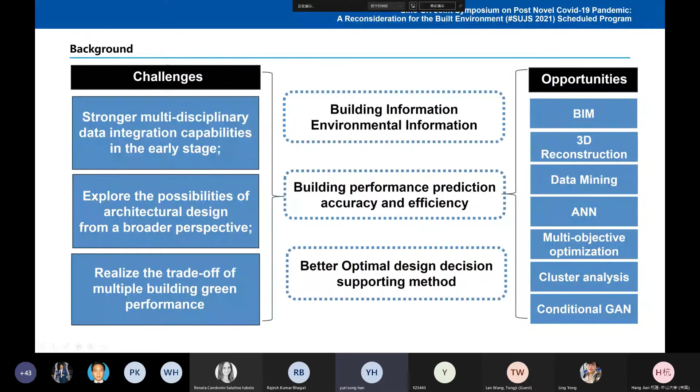We need to have stronger multidisciplinary data integration capabilities in the early design stage and explore the possibilities of architectural design from a broader perspective. Besides, we have to realize the trade-off of multiple building green performance, which has increased the difficulty of making design decisions for green performance optimization. Facing these challenges, we try to couple the AI algorithm and tools in architectural design.

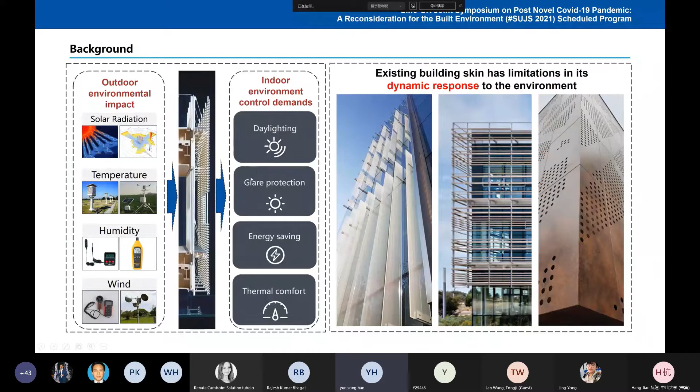And as an interface between indoor and outdoor environment, building facade is an important system, and our study is focused on the adaptive facade. That's because the rapid development of technologies such as fifth generation communications and the Internet of Things have provided development opportunities for adaptive facade. The environmental response mode of the building facade changes from static to dynamic.

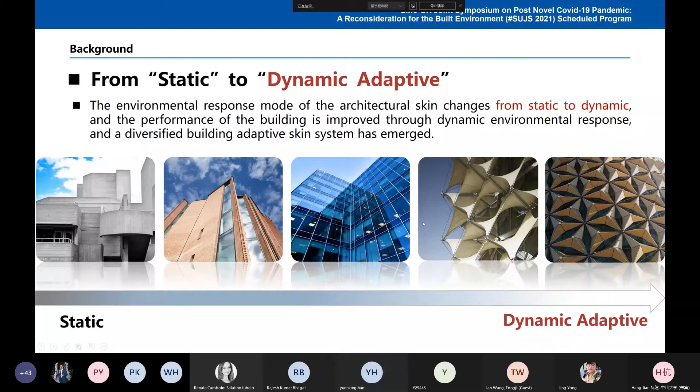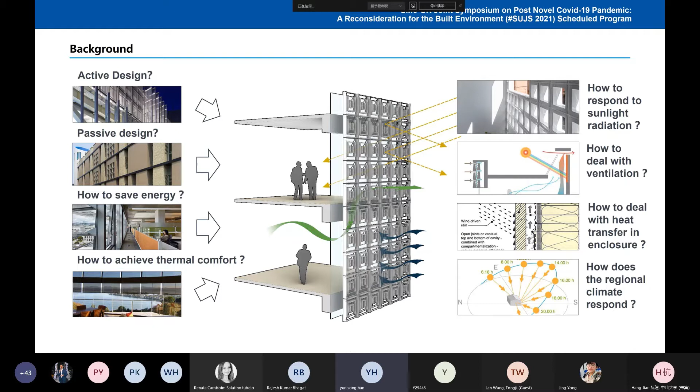And the optimization design of adaptive facade needs to consider the dynamic characteristics of its response to the environment, which further increases its complexity. To improve the optimization accuracy and efficiency of adaptive facades, we explored building information modeling, performance simulation, and decision-making support methods, and proposed several tools. The building information modeling tools have experienced multiple generations of development and have achieved the integration of multiple information, but its modeling efficiency still needs to be improved.

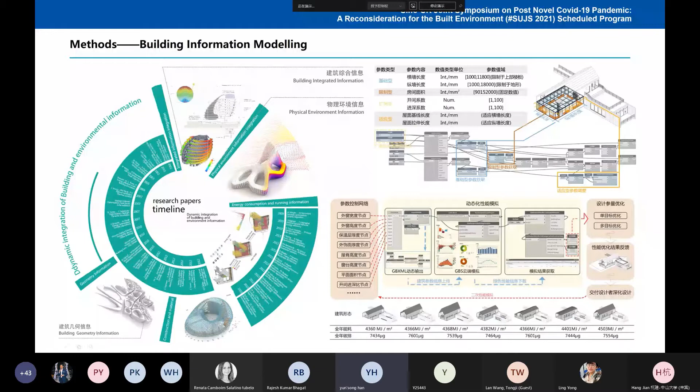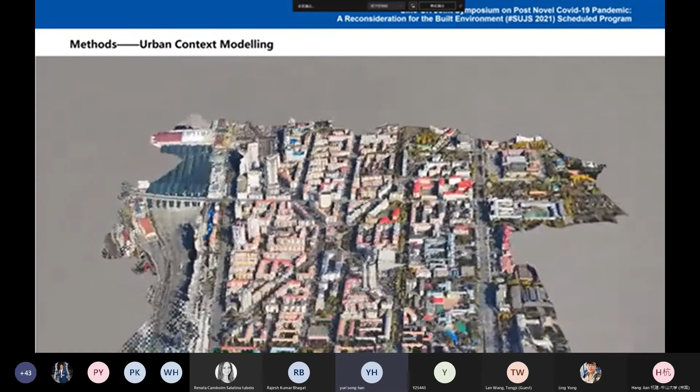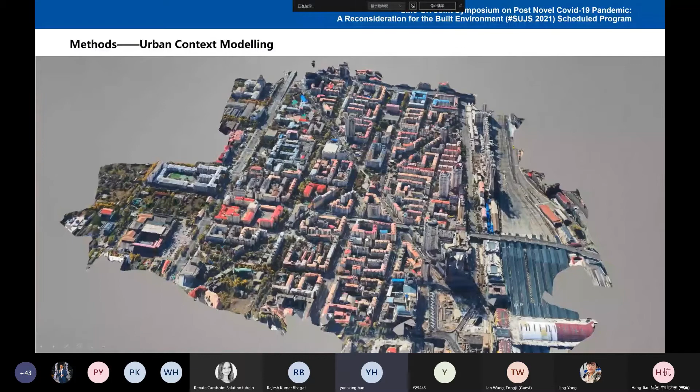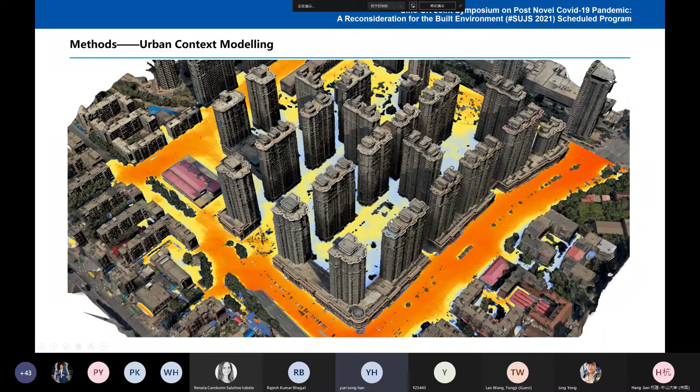We applied parametric modeling technology to integrate multiple types of building information and developed a design tool based on the Revit platform. Besides, precise urban context modeling is the basis for evaluating the green performance of building. The original drawing and field measurement method cannot obtain the geometric information of the surrounding environment, such as vegetation and public facilities, accurately, and is of great labor cost. Therefore, we explored the method to model urban context automatically based on UAV photogrammetry, which goes from image acquisition to image-based reconstruction, and ends with the estimation of green performance of buildings.

We can find that as the level increases, the details of the buildings are enriched, and a comparison of annual solar radiation with or without urban context was conducted. The results show that the shadow of adjacent buildings, vegetation, and urban facilities seriously affect the solar radiation acquired by the building facades, and the magnitude depends on the season.

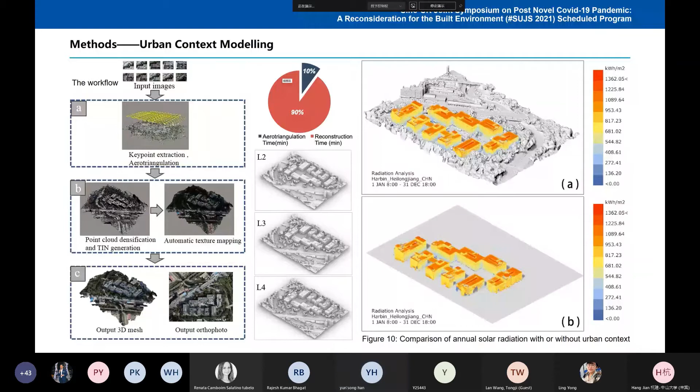Building performance analysis and standards changed the way in which buildings are designed and operated. After decades of development of building performance simulation tools, a huge family of simulation tools has been formed, realizing multi-performance simulation of wind, daylight, thermal, and energy consumption, including 3 types of method: the white box, the black box, and the gray box. However, the evaluation of different design and operation options is becoming more time-consuming and computationally intensive than ever before. Also, building dynamic simulation tools are potentially a suitable way for accurately assessing the energy performance and other green performance of buildings. They require adequate training and a careful evaluation of model input data.

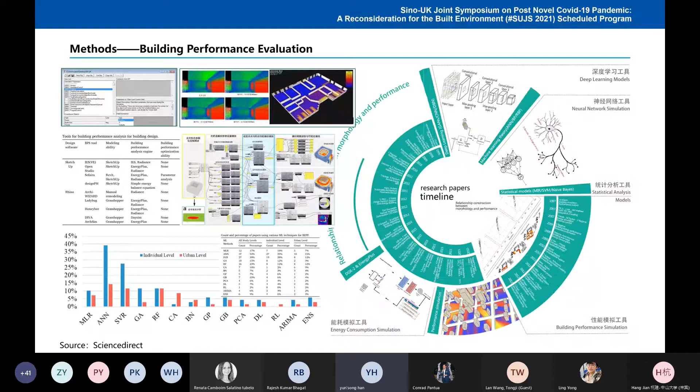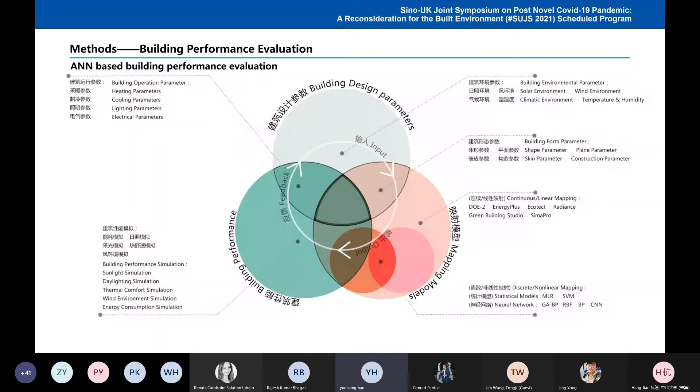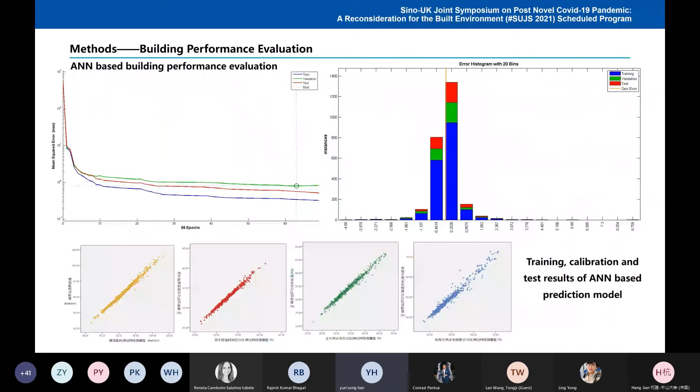In response to this problem, we explored the machine learning-based building performance prediction method, and we trained the artificial neural network model with data samples to establish the mapping relationship between the architectural design variables and the green performance. Although various artificial neural network models have been proposed for green performance prediction, most of these models have critical generalization limitations and are often difficult to integrate in existing design workflows. Hence, we try to improve the model generalization capability by feature engineering and hyperparameter optimization.

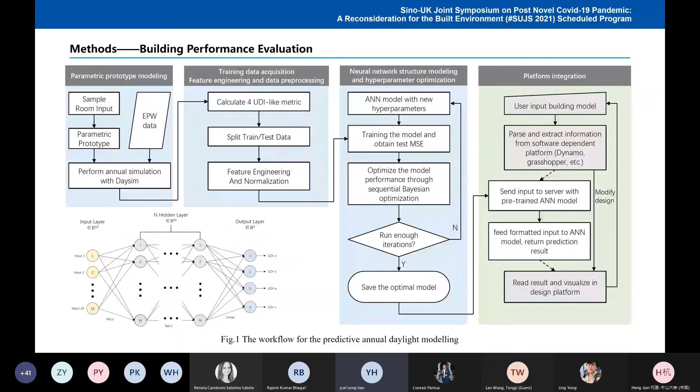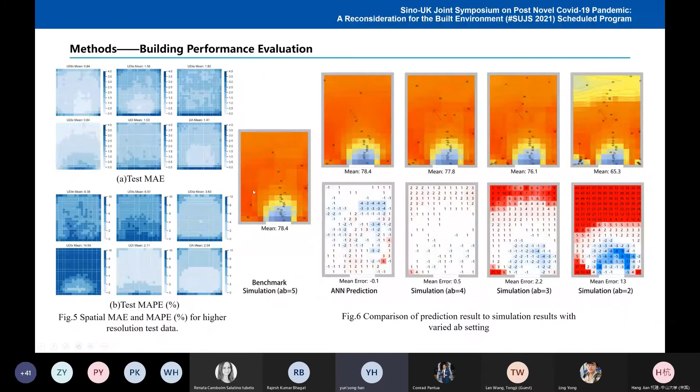The spatial relationship is defined by including sensor point local coordinates as input, and hence the model can predict the daylight performance for any point on the working plane instead of a few predefined ones. The results indicate an overall good fit. The high resolution prediction result matches the simulated values closely, despite the higher error near the walls and corners. This is due to the lack of samples in the original training set and can be remedied by adding higher resolution training data. We also proposed a design platform for multi-objective optimization design, which can realize automatic performance evaluation and statistics of building and surrounding information.

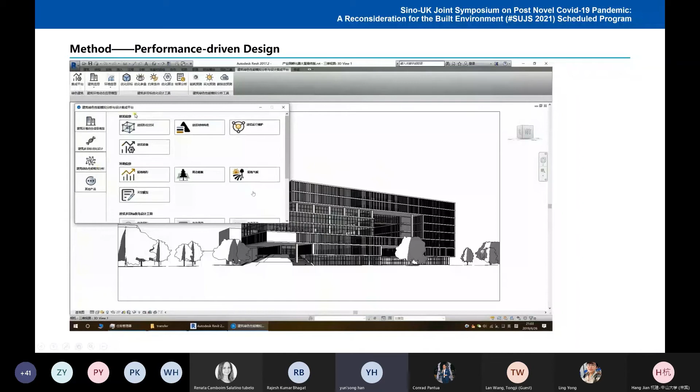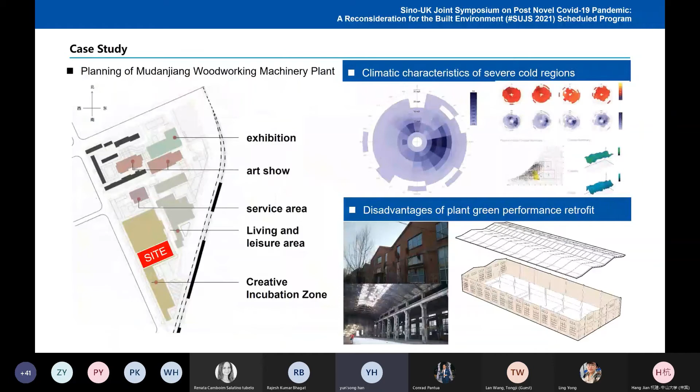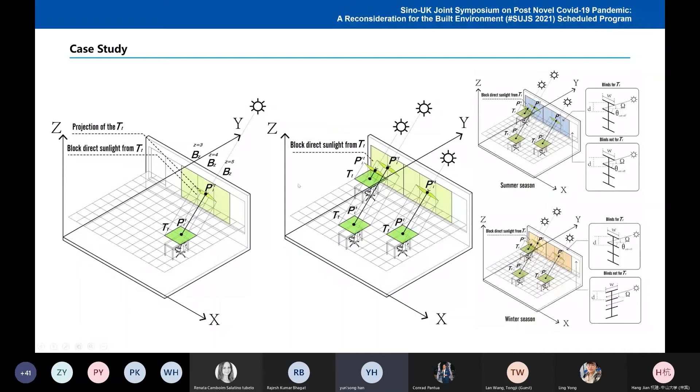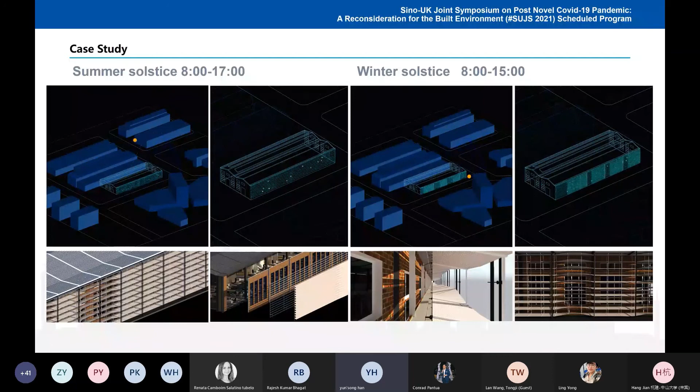The third part is a case study. Based on the functional requirements and the regional characteristics of the severe cold region, the optimized design was carried out for the disadvantages of the green performance of the plant, with the aim of retrofitting it into an open office. This is the adaptive facade system which is optimized in this case study. It is designed to improve the daylighting performance while reducing the risk of glare in the office area and alleviate the heating load in winter. The adaptive facades generated also present a rich sense of rhythm in the form, and a virtual sensor matrix is set in the simulation model to calculate the target data for indoor daylight environment optimization.

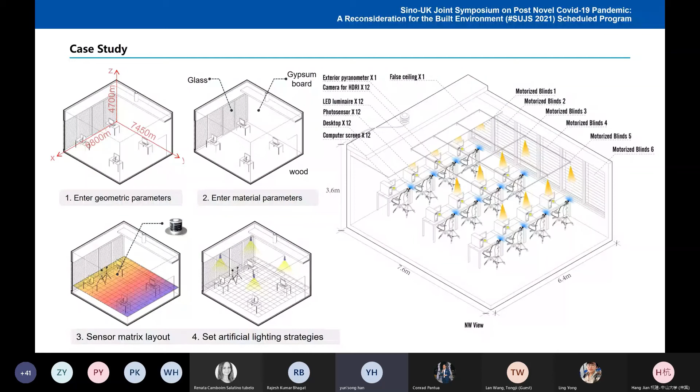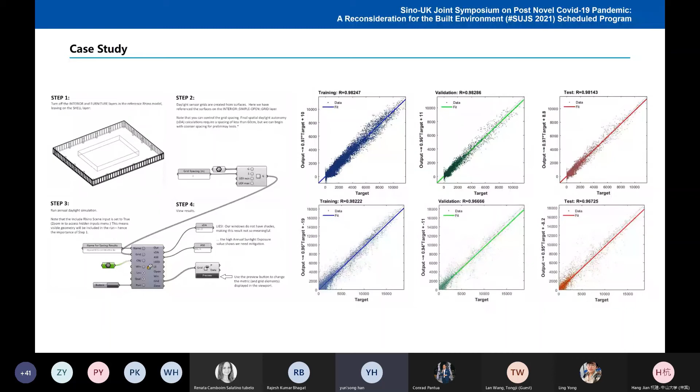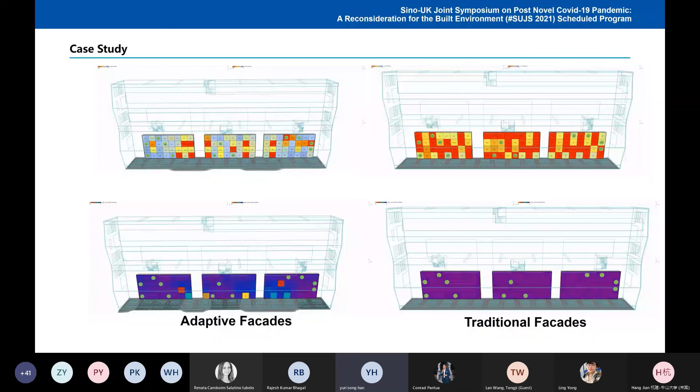The adaptive facade control model is constructed based on the radial basis function neural network. Adopting a control system based on a Gaussian process model combined with the adaptive facade control model enables real-time calculation of the relative optimal solution of adaptive facade form for different outdoor weather conditions. The results show that the adaptive facade can improve the indoor daylight performance and control the indoor glare risk. On the premise of not causing glare in the office area, it can increase the solar radiation and reduce the building's heating energy consumption. And this is the final plan.

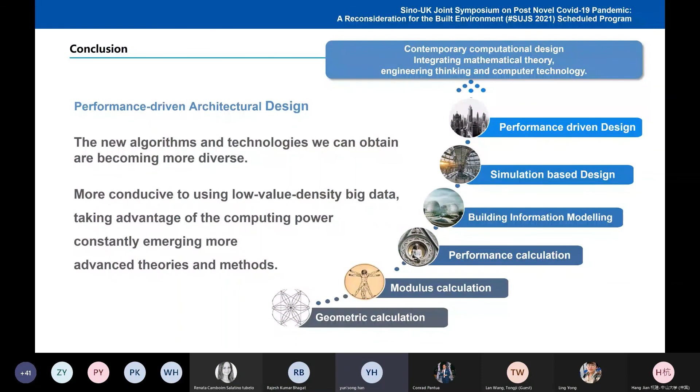As the last part, the topic of optimization for green building design has seen significant interest and advancement in recent years, particularly as artificial intelligence tools are becoming more accessible and widespread. With the continuous development of AI algorithms and tools in the construction industry, the new technologies and new tools we can obtain are becoming more diverse. And that's my presentation. Thank you.

Thank you, Professor Han. I think it's very nice to show us your technology, your software, and how you actually use that in a real